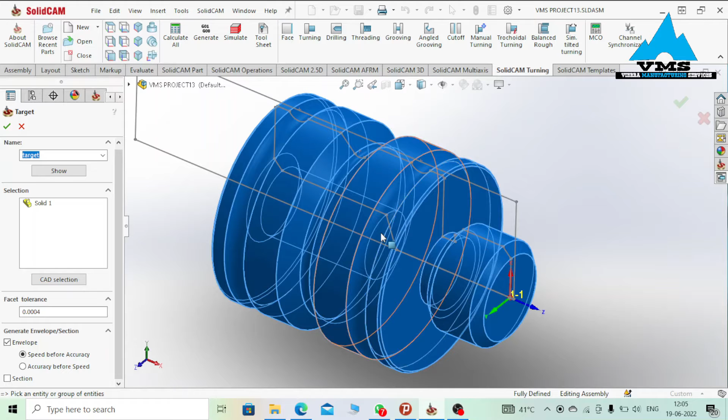Stock definition, for the facing we are using 0.002. For the clamping, we are using minus, go for the green check. Target, we are using the CAD model. Show target, go for the green check. Okay. Setup, the setup is done as in the previous tutorial.

Starting with the main spindle operation. For our first operation, we have facing. Looking at the facing operation. Geometry, we are using MAC 1, show geometry. Our geometry is simply this face. Tool, show tool parameter. We got two external tools.

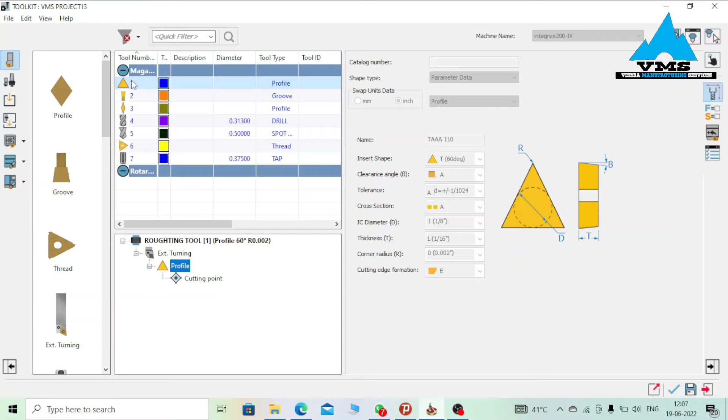Firstly, we got an external tool of angle 60 degree, and equally we got an external cutting tool of angle 35 degree. So this tool is used for the roughing, this one used for the surface finish. With this selected, go for the green check. Technology, we are using front with a roughing pass, and of course finishing with compensation on. Looking at the simulation,

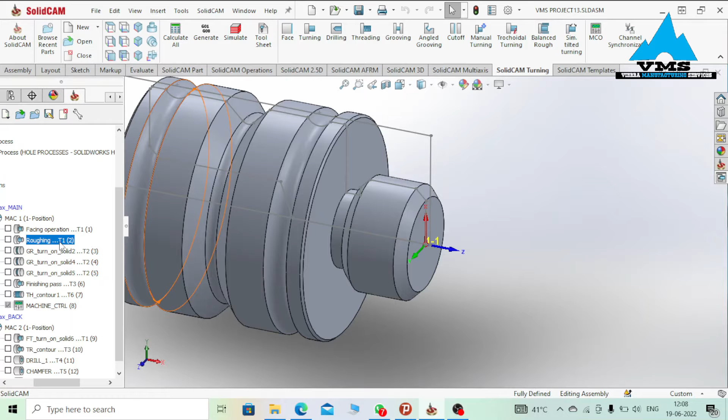next operation, we have turning operation. Geometry, we are using MAC 1. For our geometry, we start at the beginning of this chamfer right up to the end. Tool, we are using our same roughing tool of angle 60 degree. Technology, we are using front, and we are using a roughing pass with no finishing. Strategy, non-descending. Looking at the simulation,

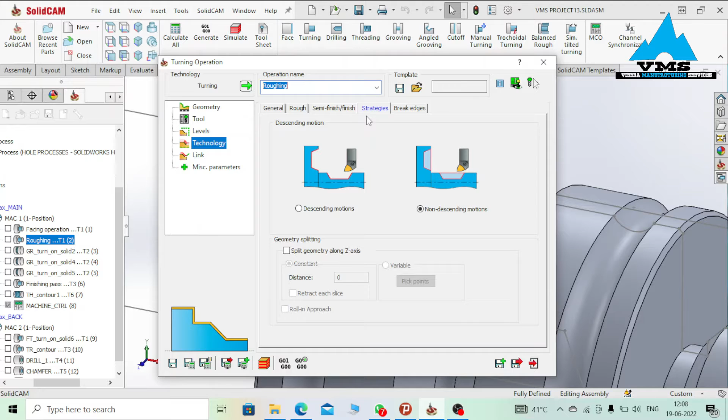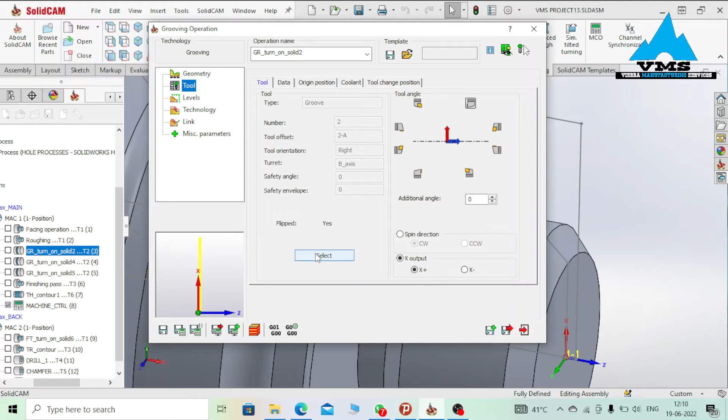next operation, we have groove operation. Geometry, we are still working with MAC 1. Our groove begins from this point right up to this point. For our groove tool, we are using an external groove tool of width 0.02 and a 0.02. Go for the green check. Technology, a roughing pass and a finishing pass with compensation on. Looking at the simulation,

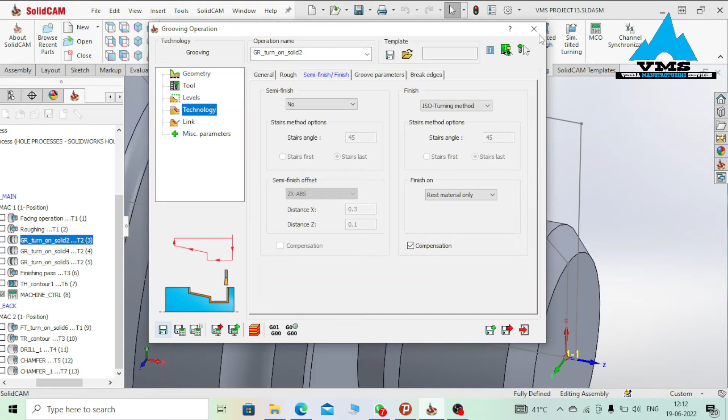operation done. So we have 1 groove, 2 groove and 3 groove. So right now we are going to machine the other remaining grooves. For the remaining grooves, geometry, we got this groove and this other groove. So 1 groove is left. Tool, we are still using our same external groove tool. Technology, we got a roughing pass and a finishing pass with compensation on. Looking at the simulation,

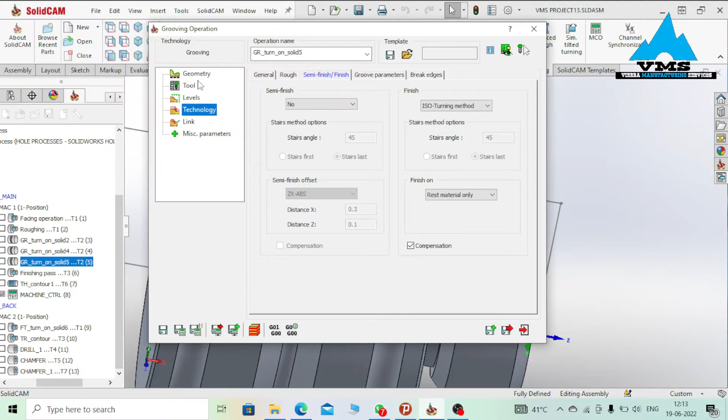looking at the last groove, edit groove, geometry, we have this groove beginning from here right up to here. Tool, our same tool. Looking at the simulation, we got some rest material over here, so we have to do finishing.

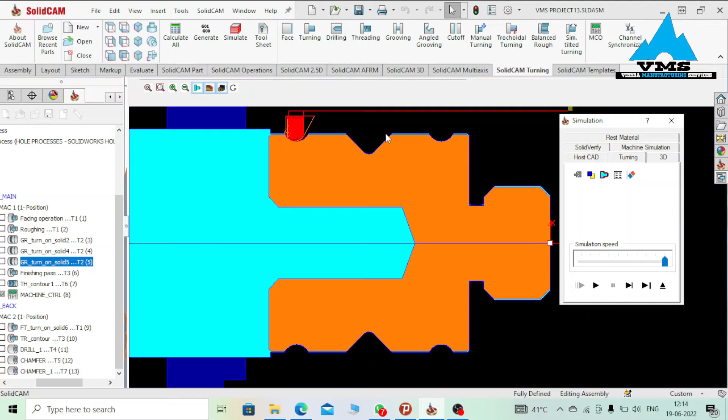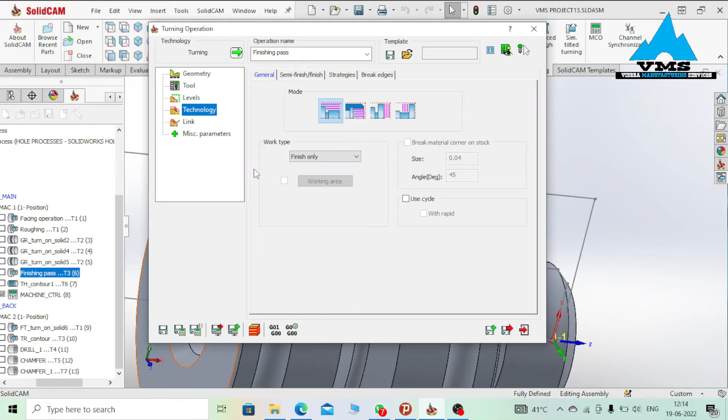Looking at our finishing pass, geometry, we are working with MAC 1. Our geometry begins from this chamfer right up to the end. Tool, we are using our external cutting tool of angle 35 degree. Technology, we are using finish pass, making sure that our step down should be very low with compensation on. Strategy, we are working with non-descending. Looking at the simulation,

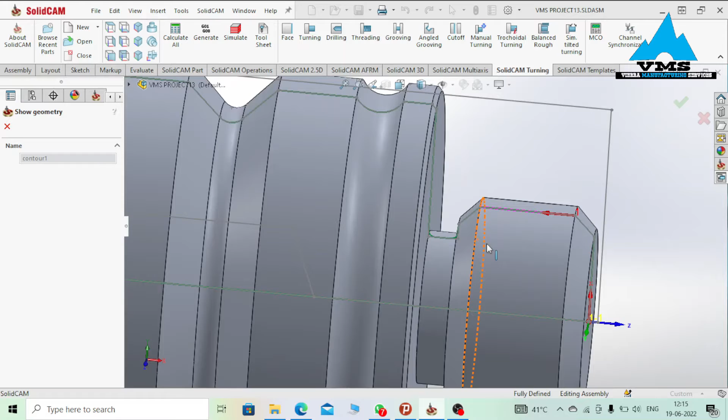Looking at our thread operation, geometry MAC 1. Our thread begins from this point up to this point, or simply this face. Tool, we are using an external threading tool. Looking at the tool parameter, for our external thread, as per our drawing, we are using half 13.

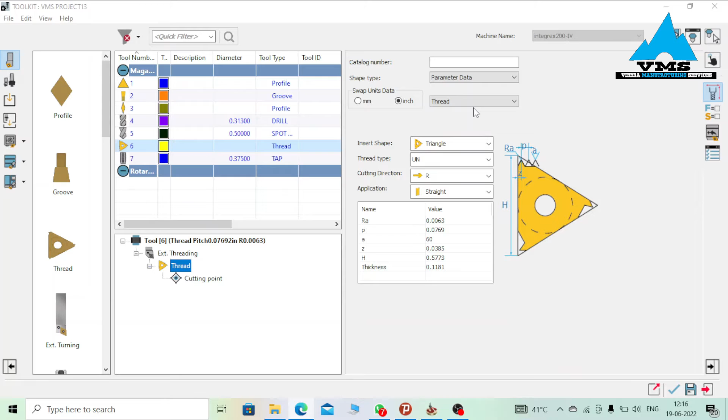Remember that half is the major diameter and 13 is the threads per inch. Making sure that you are working with triangle, as thread type, select UN and find for 1/2-13. This is half times 13. Go for the green check.

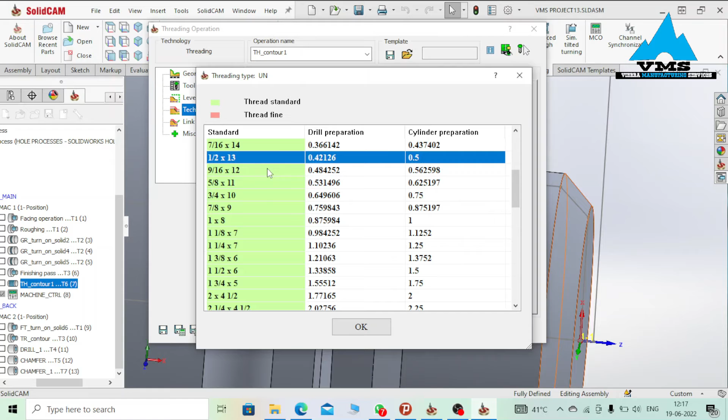Technology, as thread standard, select UN and equally select 1/2-13 and then go for the green check. Thread finish should be activated, making sure that you are using a step down of 0.001. Looking at the simulation,

at this timing point, all our operations on the main spindle have been performed. So we have to make a part transfer from the main spindle to the back spindle in order to perform the operations on the back spindle. For this, we have to use the MCO. The MCO has already been done in the previous tutorial.

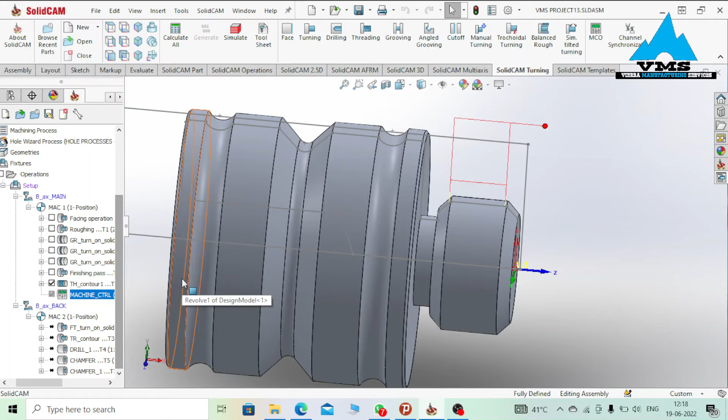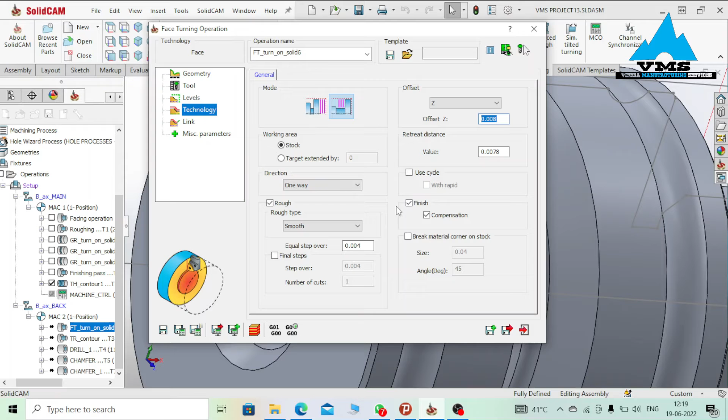Proceeding to the operations on the back spindle, the first operation at the back spindle is a facing operation. Geometry, we are working with MAC 2. For our geometry, we have this surface. Tool, we are using our roughing tool or external tool of angle 60 degrees, making sure that this direction is selected. Technology, we are working with back and not front. Equally, we are using a roughing pass and a finishing pass with compensation on. Looking at the simulation,

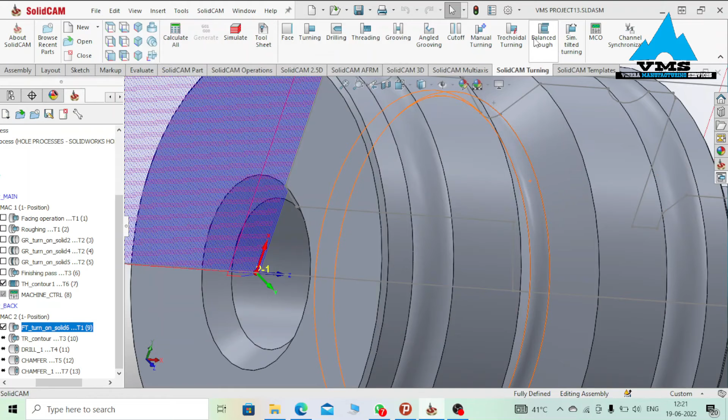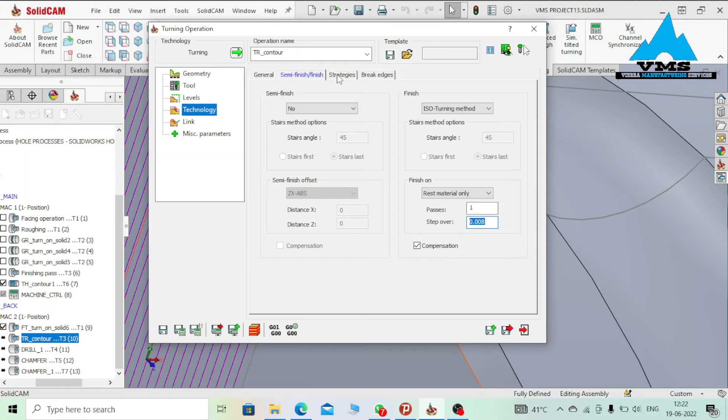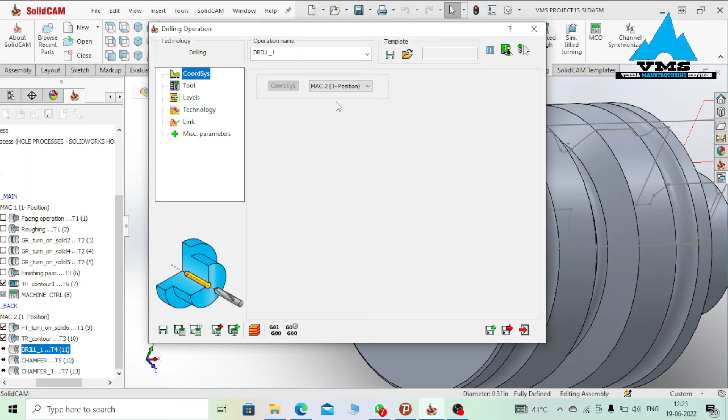if you just click on this hole, you observe that the hole diameter is 0.313 as per our drawing. Looking at the drilling operation, geometry, we have MAC 2. Our geometry is always at the center, so no need to select geometry. Tool, we are using a normal drill tool. Looking at the drill parameters, we have a drill tool of diameter 0.31 inch with length of 4. Go for the green check.

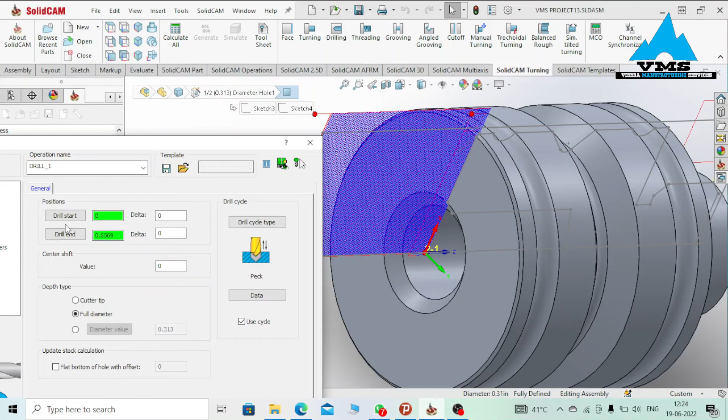Technology, our drill start begins on the surface and our drill end is at this dot point. We are using full diameter and equally we are using a drilling peck cycle. Looking at the peck data, we have a step down of 0.0025, our retreat distance 0 and full retract activated. Go for the green check. Looking at the simulation,

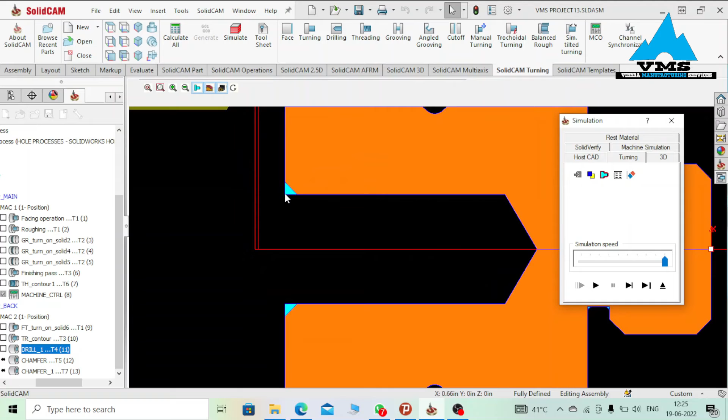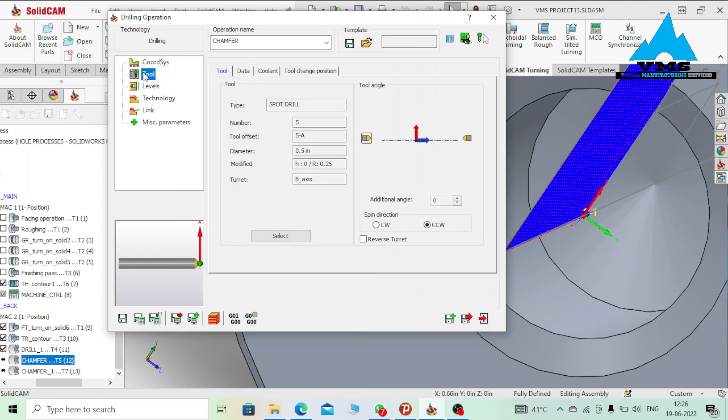operation done. We have this rest material due to the fact that there is a chamfer at this edge. In order to make the chamfer operation, you either use a drilling operation or you could use an internal turning operation. However, we will be working with drilling. Looking at the drilling cycle for the chamfer, edit operation, coordinate system, MAC 2, tool, we are using a spot drill. Looking at the tool parameters, we have a spot drill of diameter 0.5 inch. Go for the green check.

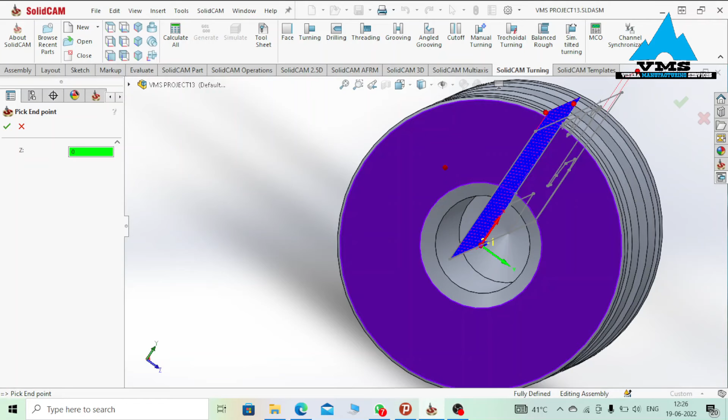Technology for the drilling start. Our drilling start is this surface. The drilling end is this surface, so 0.0. Diameter value should be activated and you just insert the chamfer value. In our case, the chamfer value is 0.45. And again, the drilling cycle should be drilling and not peck. Looking at the simulation,

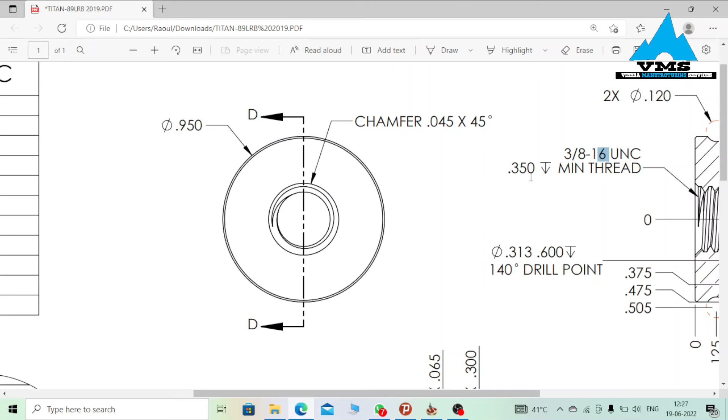for the internal thread, we have major diameter as 3/8 and threads per inch as 16. Remember that the thread depth is 0.35. Looking at the thread operation, firstly, I'm going to change its name to thread operation. Coordinate system, we are working with MAC 2. Tool, we are using a tap tool. Looking at the tap tool parameters, since we are working with the inch system, our pitch is 1 divided by 16. Thread diameter 3/8. Go for the green check.

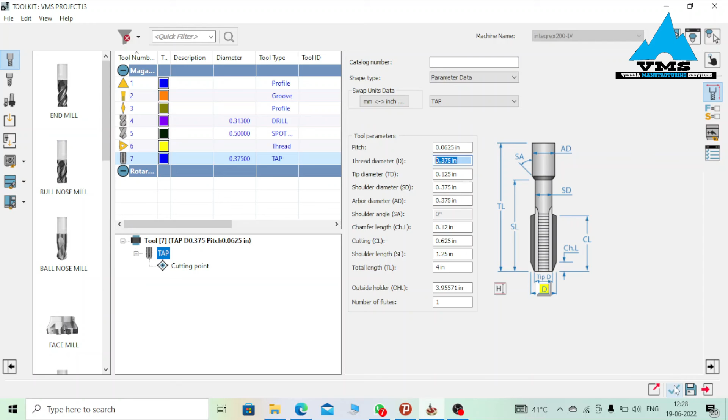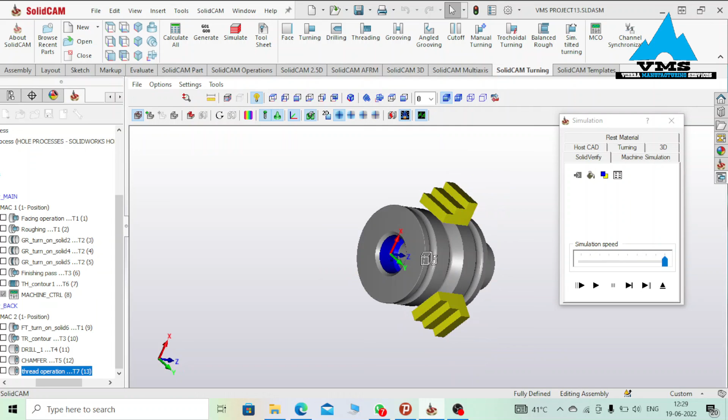Tool direction, we are using this direction. Technology, drill start should be this surface. The drill end should be 0.35, making sure that you are working with tapping. Looking at the simulation, solid verify. We want to synchronize the main spindle and the back spindle. Go for channel synchronization, save and exit. Looking at the full simulation, solid verify.

With this, we are done with VMS Project 13.